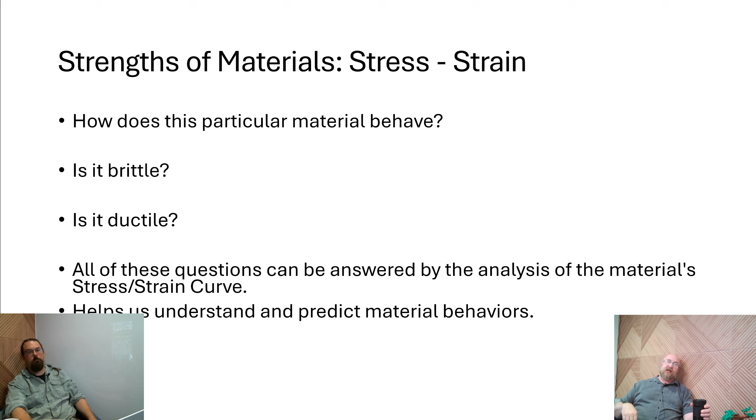So if you go to the next slide, we'll define it here. It's the relationship between the magnitude of applied stress on the material and the resulting strain, or elongation. Everybody has heard the terms stress and strain. They're not interchangeable like they are when we're talking in English. Our common vernacular does not apply to these two terms when we're talking about material properties.

They're related, but in common English, unless you're being very precise about your language, these are often interchanged. They're different. One is the result of the other. Stress is an applied load. So me pressing down on this table, I'm applying stress to the table. Strain is how much that table is deflecting or deforming because of the load that you've got there.

And these properties actually have units involved in them, so it's important to keep that in mind.

If you're thinking right now, we're in the first week of the quarter here. We are all of a sudden going to go through material that goes down to the atomic level of metals and then bring it back up, talk about how you put it in an oven to change its material properties. We are applying on you, the student, stress. I think you probably feel that. And that stress that we are placing upon you, you will then strain. You will stretch yourself to accommodate that load, or you'll crack. It's not the intention. No, you all are ductile enough. You can handle this load. But we're going to put it in terms so that you can understand that.

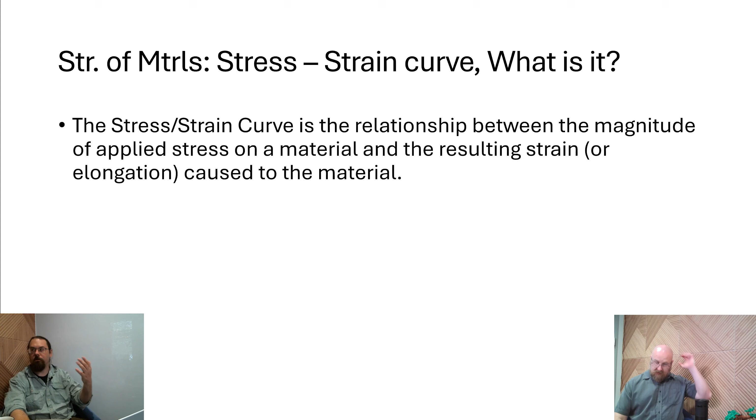So stress itself, when we are showing it in an equation, we use the Greek symbol sigma, the little O with the curly Q coming off the top. It is an applied force, in newtons, over a given area. The area is important so that we can get materials to behave the same, and we have something to compare materials against. We can make comparative analysis of different materials.

So if we go back to the table Mike was pressing on, it is made out of one thing, this plywood that is 1.5 inches thick, right? Well, what if we are just looking at plywood in general, regardless of thickness? We need to do that over a cross-sectional area in order to make apples to apples comparisons.

And this is one of the things that people can get a little tripped up on when first looking at this subject matter: remembering that when we're talking about stress and strain, we're always concerned with a force applied over a given area. The reason for that is because we need to be able to compare dissimilar materials to each other versus their performance under different types of loads.

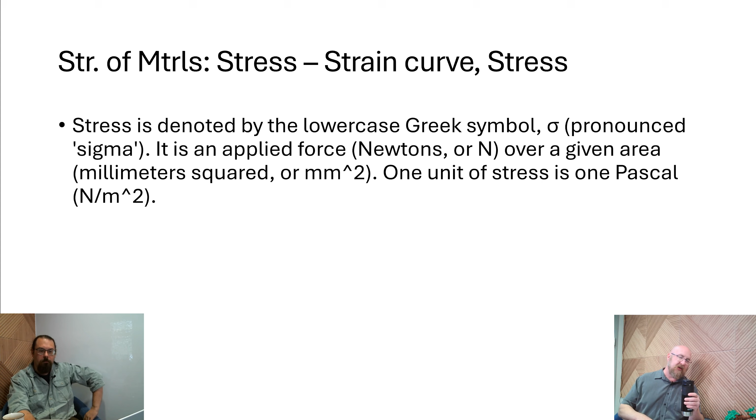Strain, on the other hand, is a unitless unit. Unitless because the units themselves cancel out. So it's lowercase epsilon, the little fancy e. And strain is the length of elongation in millimeters, inches, whatever it is. If you're working in psi, your strain is in inches, right? You keep the unit system the same. If you're working in cubits, I have no idea what you're doing. Just stop.

But it's a length measure, right? And then we divide that by the original length of the material. So the resulting unit is millimeters over millimeters or inches over inches, which actually cancel each other out. Another way to consider it is that it's kind of a percentage elongation, because it's your original length versus your new length after the stress has been applied. So when you divide those two numbers out, you get a ratio

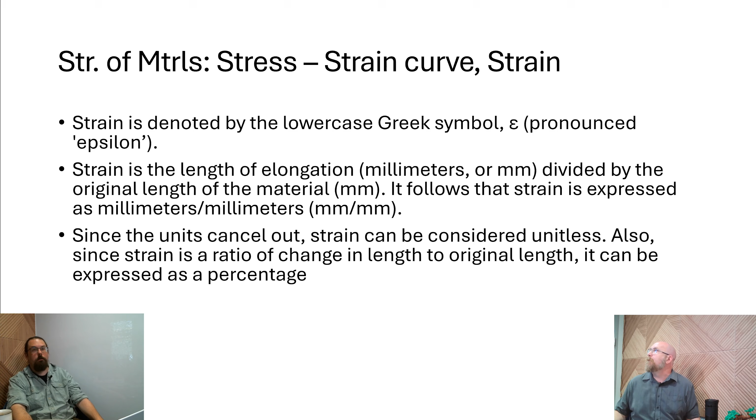So then what we do is we put those two things, stress and strain, on two axes of a chart, and we get something that looks like this. This is just kind of a generalized one, and we're going to go through the terminology that's on here. So you've got stress going in the Y direction. You've got strain going in the X direction. And what we're doing is we're seeing how much it stresses given any load.

So as the load rises, you'll see there's this linear portion where it goes up in a straight line. As stress increases, the strain also increases in this very predictable linear relationship. Yeah, and that's true for the vast majority of materials, at least things that we consider normal solids. Newtonian solids, like a ceramic or this table or metal or plastic or whatever have you. When we're talking about solid materials, most of them will have this linear region right here.

And any line has a slope to it, a rise over the run. And when we calculate out that ratio, we would call that Young's modulus. And basically, a steep line means that the material is extremely rigid. Yep.

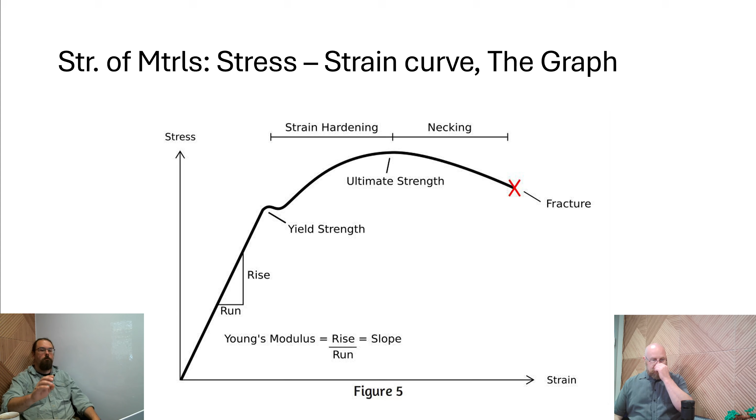So let's go on to the next slide. This is just a description of what you saw in the previous slide; it's here for you when you need it. So let's talk about how we test these things. Usually we play around with dog bones. This is a standardized test article that we put in a machine and pull apart. This is for tensile testing, pulling stuff apart. You can also do compression testing, flexural testing. There are multiple mechanical ways that we test materials.

When we do this, we pull it apart and measure the original length versus the elongated length. We want to do that over an area, not just the region where it's stretching the most, and we want to make sure that wherever it fractures is inside that region. The dog bone is designed to ensure that the fracture happens between two points. It's narrowed down in there, so the cross-sectional area is less. That cross-sectional area is the width and thickness of this dog bone.

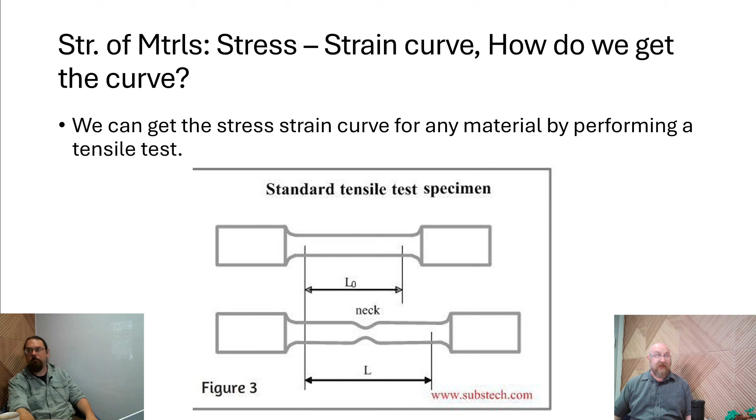So basically, we do that multiple times. We want essentially a sort of median. We need a sample size. We need the median characteristics, not the outliers. And for the well-documented materials, this is done thousands of times. We get samples of materials from multiple manufacturers to come together and do this type of testing, so that we guarantee that the graphs that get published are as accurate as possible, so we can use them for engineering applications.

And if you've got a copy of the Machinery's Handbook, which is a good thing to have if you don't have it, it has tables and tables of materials and their Young's modulus and their yield point. And the reason we're bringing this up is that these are all solved problems for the most part for any material that you guys are going to realistically interact with. If you need to know this stuff, you don't go and do this testing yourself. You look up the results on a chart, and if it needs to be a certified material, you have a testing company do that according to ASTM standards.

I mean, unless it's tritanium. Or unless it's duranium. If you're inventing a magic science metal, you probably should do some testing on that and see whether or not you're going to have a brittle failure when shot at by the Borg.

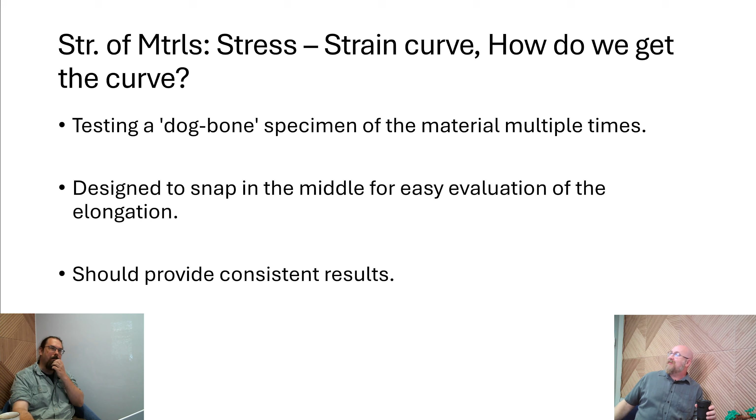Moving on. Strength of materials. So just to get more into Young's modulus. Young's modulus is what allows us to compare items together. If we remain in the safe region of this linear region, the material will snap back to its original shape. It's not actually being damaged by the loads that we're applying to it, so you want to make sure that you're staying within that linear region, well below the yield strength for whatever application you're doing. And because we keep this in pascals and strain, two things that are the same regardless of the dimensions and geometry of the material, we can compare different materials with one another, because we're removing the variables of geometry.

The thing is that you can make a piece of plastic, if you make it thick enough, bear the same load as a piece of steel. And you can make a piece of steel fail by making it small enough. For example, you can get steel foil that folds like paper and tears because the cross section is so thin. So this is what allows us to compare materials, and then you can adjust your geometry to fit your application.

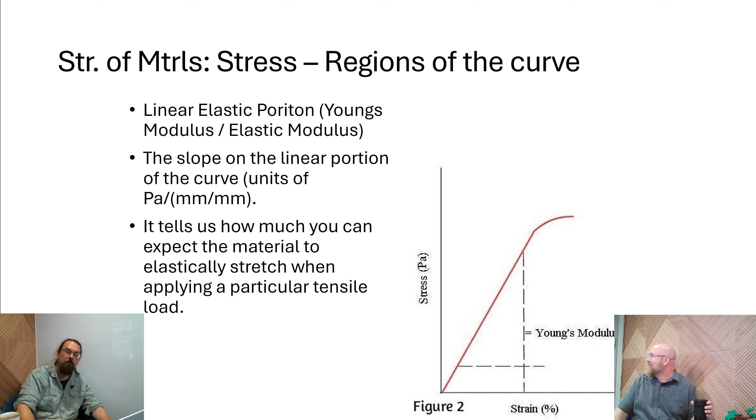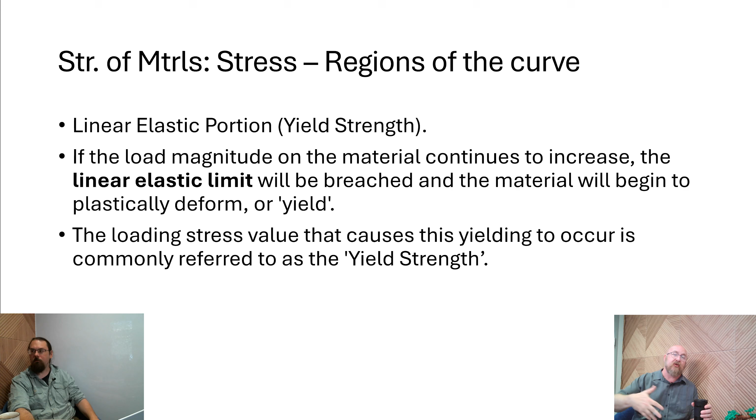Maybe. Anyways, so Young's modulus. This is the portion that we use to compare materials most often. Okay, so linear elastic portion, yield strength. We've gone through all of these things, so I'm going to leave these here as further descriptions as you're reviewing this slide deck, because we've been talking for a while here. So just make sure that you're relating the descriptions to what's here on the screen, on this graph.

So here is an example of low carbon steel. We have a ductile failure mode here, but we also have a very steep Young's modulus, a high rigidity material up until its yield point, but then it stretches quite a lot. And you can also see that it work hardens quite a lot, because as it's deflecting, it continues to take more and more strain up to a certain period. In the grand scheme of things, mild steel doesn't have the highest ultimate strength, but you can see that its ultimate strength is about 50% greater than its yield strength.

And when we talk about work hardening, why do you think they smack hammers on steel? That's what it's doing. When you're cold forging material, you are literally doing this to the material. You're introducing strain to keep it going.

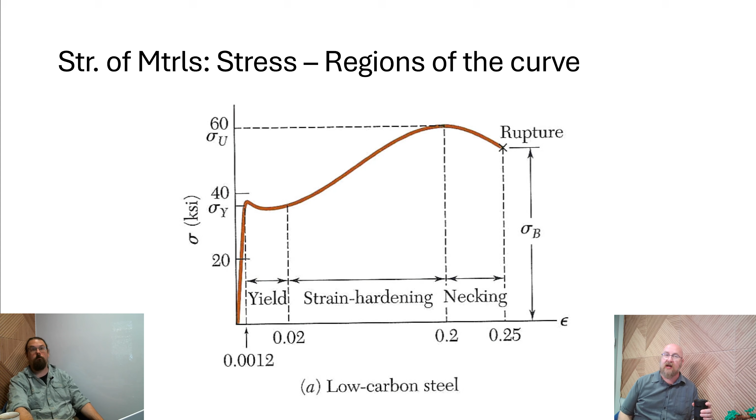So this is just a visual example of the brittle versus ductile. They both have relatively steep Young's modulus, but a ductile failure, whether it has a higher or lower yield strength, doesn't really matter, has a really elongated failure mode where the plastic region is really exaggerated on the graph. On that brittle one, it's just failing and dropping to zero super quickly.

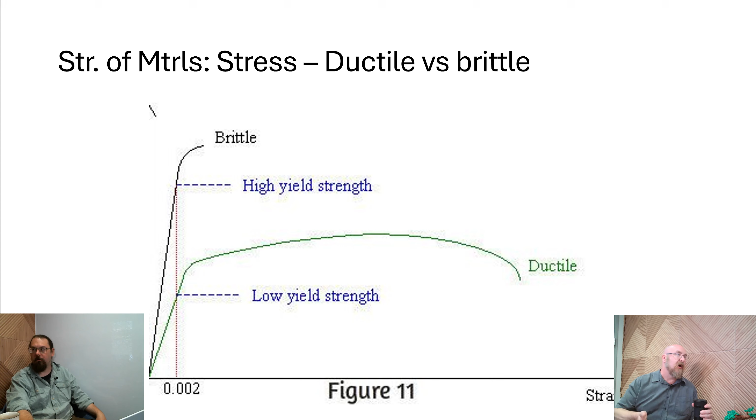And when you're looking at these graphs, typically you're not going to get an X on the failure point every single time, FYI. Just when the line stops, that's where the fracture happened. And when you're actually testing it on a machine, it will measure the drop to zero, so it'll just be a straight line down. So that's pretty much stress and strain.

And we're going to spend a lot of time talking about material composition as it relates to metals. We're going to focus a little bit on other things in the next video, but we'll save that for the next video. So keep in mind what we're talking about with stress and strain for all of the discussions around materials. It doesn't just apply to metals. It applies to all materials that we build stuff out of.